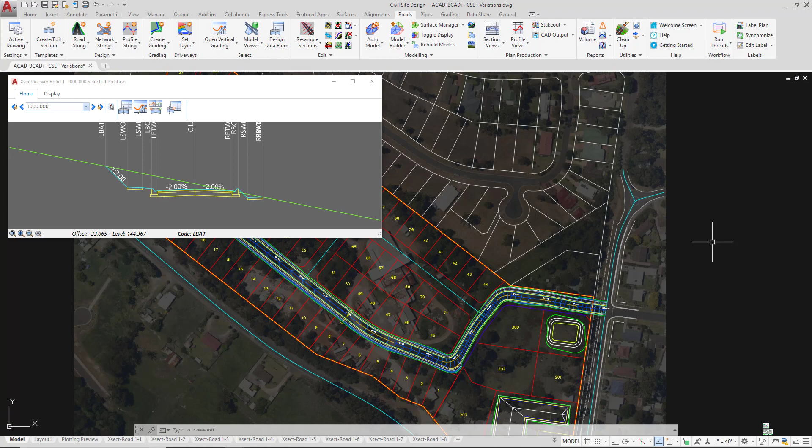Lastly, we're going to look at a variation which will help us control positions of codes on the template. Before we start, we're going to open up a cross-section around the 350 mark. So on the cross-section viewer, you can either scroll down to 350 within the list or go and pick close to 350 on the drawing.

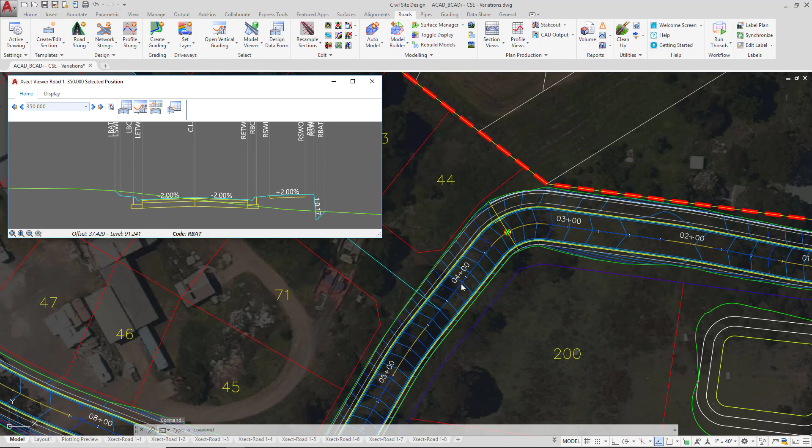We're going to adjust the crossfall on the right-hand side of the carriageway. So at the moment we have -2%. What we're going to do is between station 300 and 400, transition that crossfall from -2 to +2, and then from 400 all the way around to the end of the string, we're going to maintain a +2%.

So to do this, we're going to hover over the RETW code, right-click, click on Add Variation, Modify Section, and this one is called Vary Section Slope and Width. Complete the form as shown. So let's have a quick look at what we've done here. So we've said the start station is 300 and the end station is 400. The code that we're changing is RETW.

Now we can change the width of this current section if we chose to. And within the pull down there's two options. There is set value and increment value. Now if we leave the value as set and type in 0, what we're actually doing is saying, well, this section here between the centerline and RETW, I want the width of that to be 0, which obviously we don't want. We're not changing the width, so what we've done here is set increment value, which means add to the current width a value of 0. This means that we're not changing it in any way.

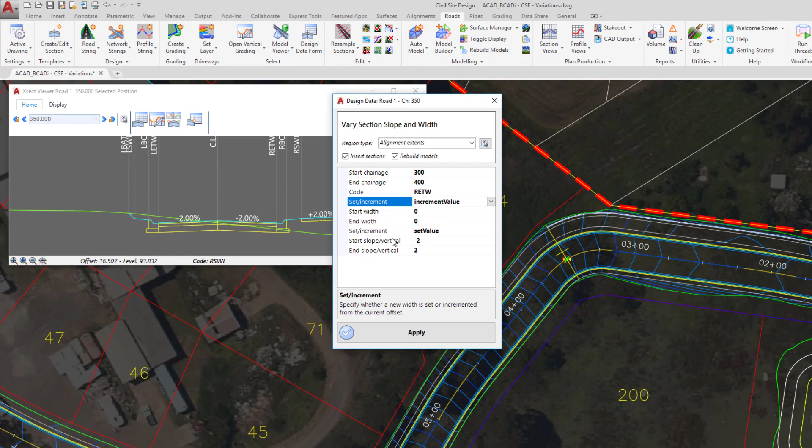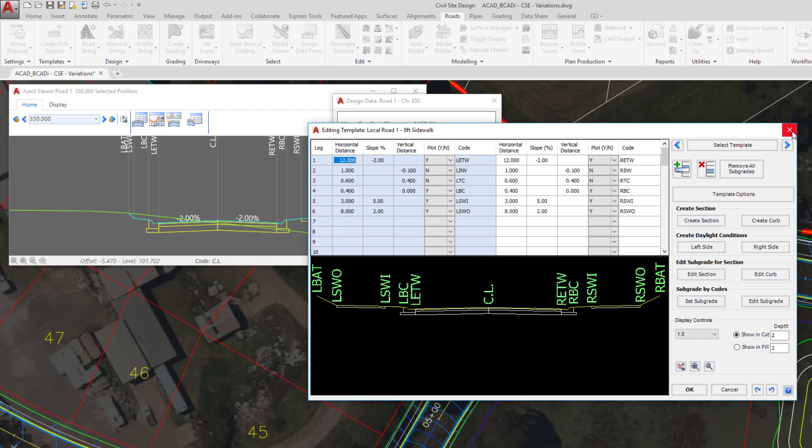Underneath, we've then got the option for a slope or a vertical. So initially you may be thinking, well, how do I know whether or not I'm going to be typing in a slope or a vertical distance? Well, in the Create Edit Section form, when we created our particular section for Road 1, we specified for the different parts either a slope or a vertical distance. Now the code that we are modifying is the RETW code, and this was created using a slope. This means that any value we place in the form below has to be a slope value rather than a vertical distance. So the curbs were created with vertical distances, therefore values in here would have to be vertical distances.

So we've said we want to set the value at station 300 as -2%, which is what it is currently. By the time it gets to the end station, which is 400, we want the slope to have changed to +2. Click on Apply to see the change. If you've got station 350 open in the cross-section window, you'll notice that the slope for the RETW section is 0, and this is because it's the halfway point between that transition.

So if you scroll back on your cross-sections, you can see that we'll transition back to the -2. If you scroll forward, you'll see that we transition to the +2. However, once we go past station 400, you'll see that we're back down to -2% again. That variation only controlled the codes between station 300 and 400. So what we need to do is continue the variation all the way through to the end. So to do this, we're actually going to add one more.

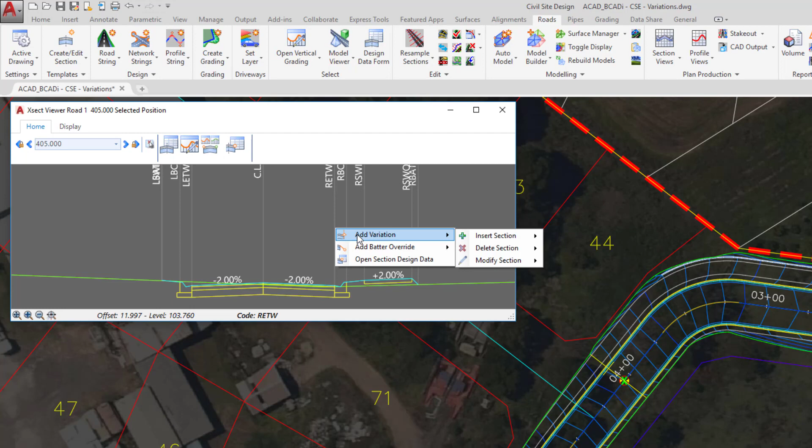We're going to right-click over the RETW code, Add Variation, Modify Section, Vary Section Slope and Width. Complete the form as shown. So in this instance, what we've said is, well, at station 400, all the way to the very end, I'd like to change the RETW code. I'd like to add nothing to the width, or take anything off the current width.

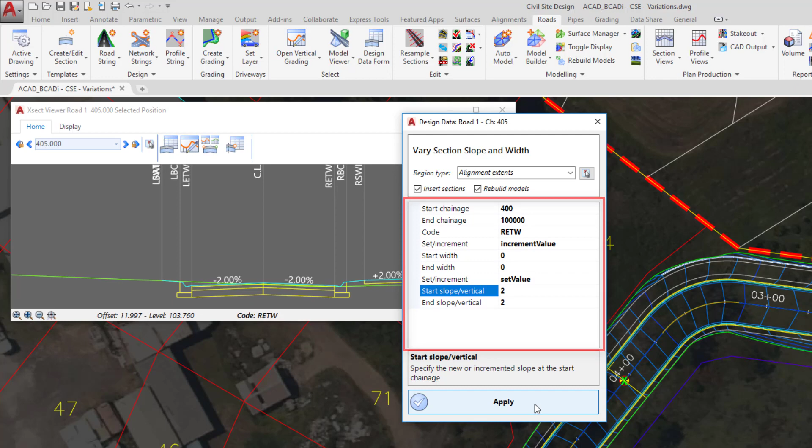What I would like to do, though, is at station 400, set the slope and keep it at 2%. And by the time it gets to the end, I want it to also maintain that 2%. Click on Apply. Now, if you haven't already done so, you can scroll past 400 now on your cross-section windows, and you'll see that the slope is remaining at a +2%.

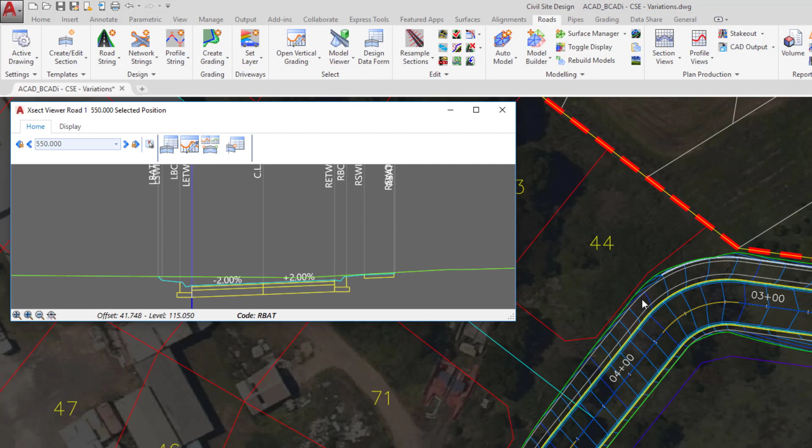So there is a case for saying in some instances, well, should I apply a new template or should I apply a variation? But you can see how quickly you can add variations and quickly you can modify the template. So it can be a very good time saver to use the variations, but really it's entirely up to you to decide what's the most efficient way of working and whether or not applying a different template or applying a variation is the right solution for you. Feel free to open up Model Viewer and have a look at the result of the changes we've made.